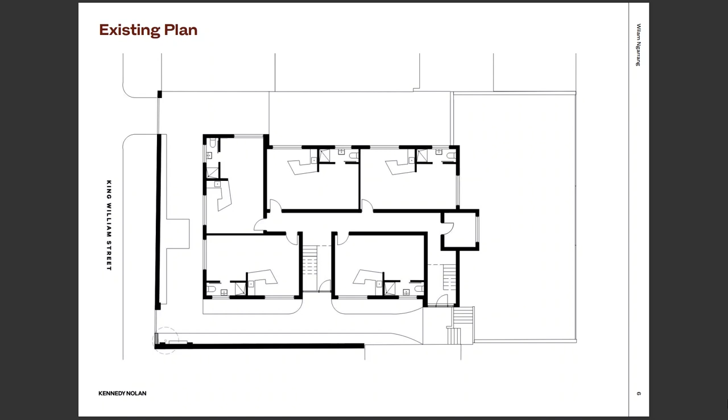A replicable model, a fast model that didn't require town planning processes or long construction processes, and something that could take the bones but improve the performance, make better use of the space, and give residents a more comfortable, enjoyable life.

The key targets were debated and agreed, and an important part of our process was designing a team and a process, a way to do it, not just the conventional way.

The design team was non-hierarchical, so it was Finding Infinity, Kennedy Nolan, the builder Wilderness Building Company, the client Triple, the project manager Resin, all working together for as little design as possible.

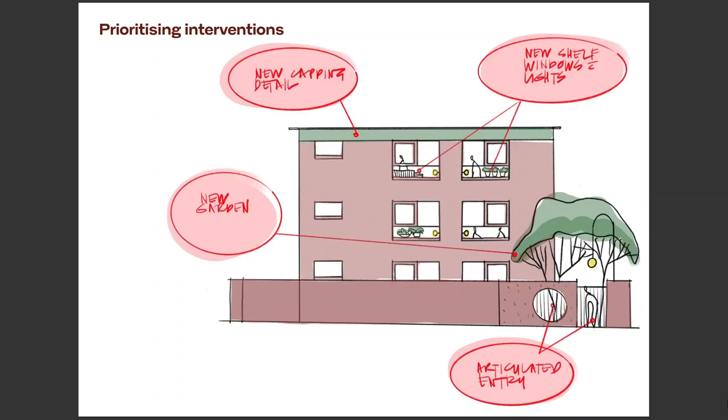It was not heroic architecture. It was modest. We had to make a case for our interventions, to be strategic, to present them to the team. We had to put our egos aside too when they didn't all make it in. We had to really debate and fight over and agree every bit.

And this is where we were ending up. That's me. Okay, so I'll take you through the plan.

Lower ground, old asphalt car parks converted to shared facilities and a garden.

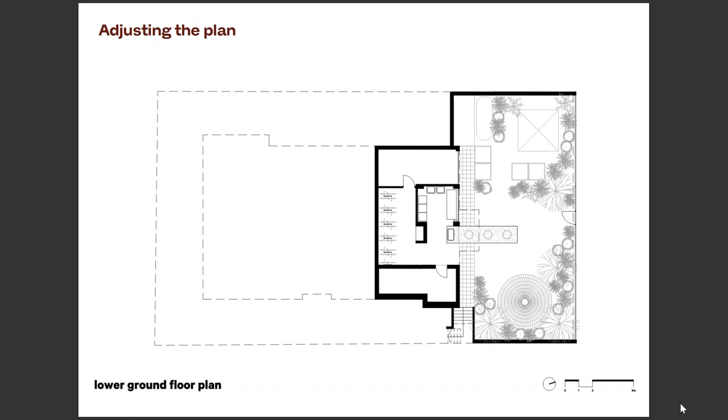The ground level, we really reworked that King William Street entry and amplified that in the tiniest amount for maximum effect. And apartments made a new relationship with small courtyards, where before you saw it was just kind of bleeding into the outside of it. And there's that little entry.

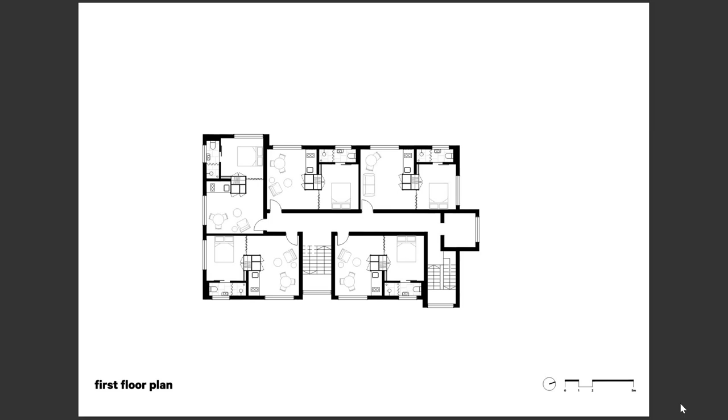First and second floor, apartments were reworked, and the old laundries at the end of the upgraded hallways became small sitting rooms. Really simple move. So it's about making a home.

Importantly, there's also an emphasis on creating a sense of domestic comfort, on making places for people which are warm, welcoming and beautiful, and actually modest in their own way. This was the little original mini plan we were handed.

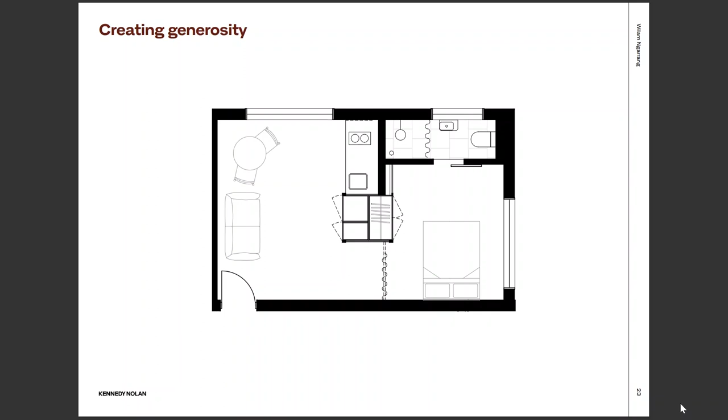So when space is tight, often the focus is shrinking the typical, resulting in many tiny complex things. Here in these early renders, we've aimed for a few big moves with generous scale, being efficient, not a mini house.

We've thought carefully about household storage, working in a small but deep kitchen, and potential furniture layouts of future residents. These bedsits may not have balconies, but new sliding window suites make a great connection with the surprisingly treed inner city environment, which we're pretty lucky to get in this part of Fitzroy.

Accepting imperfection became something we had to get used to. Given the objectives and financial constraints, sometimes we just had to embrace the least ugly option. Those tiles there on the left are a little example of that.

So housing a community, the car park and Undercroft were perfectly located on the north of the block. And during construction, it was a place where salvage materials were stored and later repurposed. Basically, they went downstairs and we had to work out what to do with them.

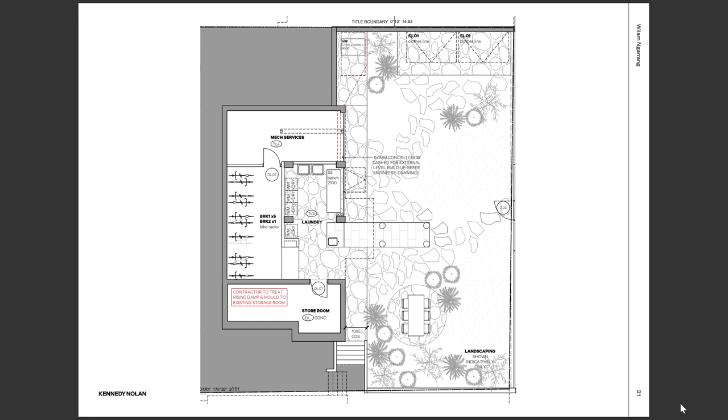And the new communal laundry took this prime position with very low ceiling, and it was elevated into a social space. So we went to the marble distributor to see what they had left, and a large shared table made from marble offcuts provides an armature for being together, which is an opportunity to build community amongst the predominantly single people households in this project.

So on the site, landscape was privileged and augmented and includes a shared veggie plot, hills hoist and composting for the building. And little gum saplings were planted like the big, large gum trees, and we were not afraid of large canopy trees in this space.

I guess this is one of the first projects we got built as part of this bigger citywide strategy called New Normal, a $100 billion strategy to try and transform the entire city to become completely self-sufficient. Really, it was about transforming that whole strategy into 15 projects that are physical examples of the policy we want to see.

To do that, we needed to build physical examples that are profitable. We needed to make sure people love them. Basically, we want to create these examples to make it easy for a politician to stand in front of, cut the ribbon, and replicate.

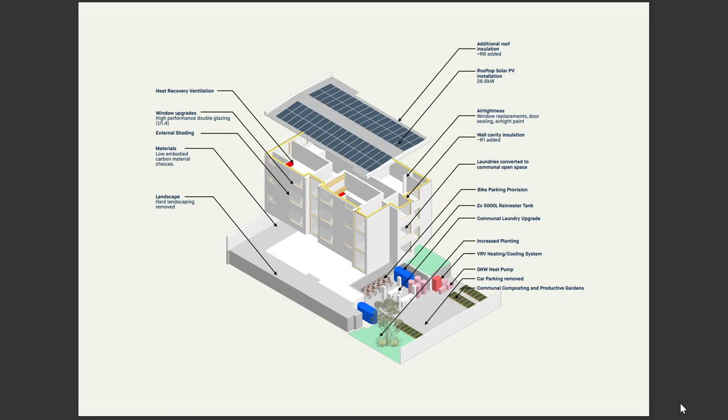The perfection is in the imperfection—there's nothing perfect about this at all. We replaced the glazing, not for performance, but because it was falling apart. We like blow-in insulation, there's airtight paint. We managed to get heat recovery ventilation in there. We've got a central domestic hot water system from a heat pump, and VRV—it didn't used to have heating or cooling, and now it does, for example.

This was quite a democratic selection of what we did in the project—it was actually like a group survey that went out. But there were certain things we didn't do, and that was part of it, because we had to meet a certain budget. If we went over budget, it would mean the rent was higher for the residents, so it wasn't a great example.

This is the running cost before, the future projected cost, and what we're targeting at the moment. This is the overall summary, and for us it's really important that it's a financial example as well. So build cost $6 million, retrofit $2 million, and we hit the client's target return.

Bills go down from $35 a week to $2 a week. Rent had to be increased to justify it, but in that time the rent has kind of increased to that level anyway, and the idea is to retain the rent for the future.

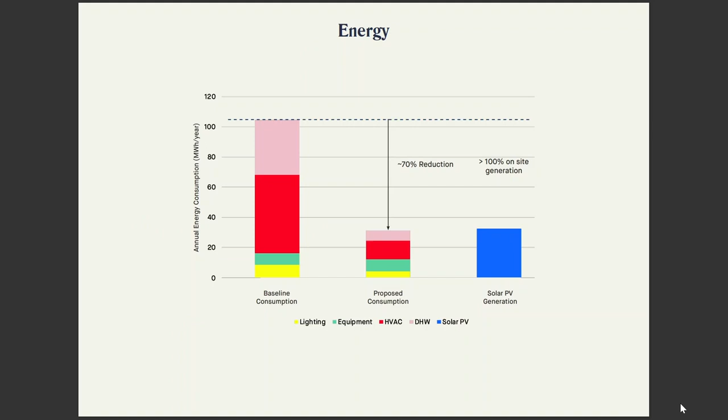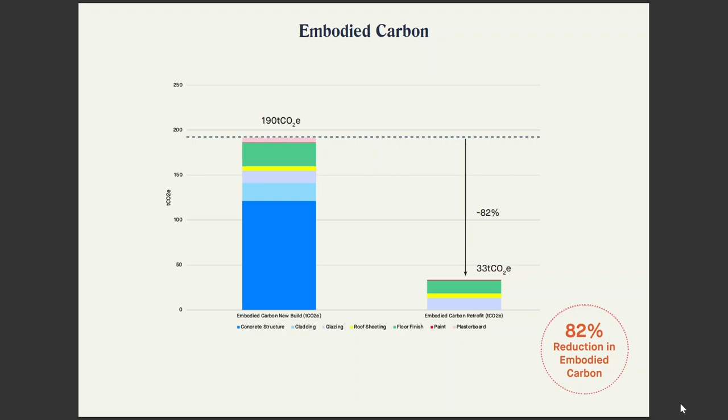So just lastly, to bring it all back—for us, a big part of this project is that if we'd just done this technical financial analysis and built something no one cared about, no one would know about it. We're having amazing conversations around the country about this project and really trying to replicate it, and we're not just talking about it—it's been an extremely helpful tool in that process. I'm really passionate about the fact that architecture is that vessel and glue to make sure this is something people really care about.